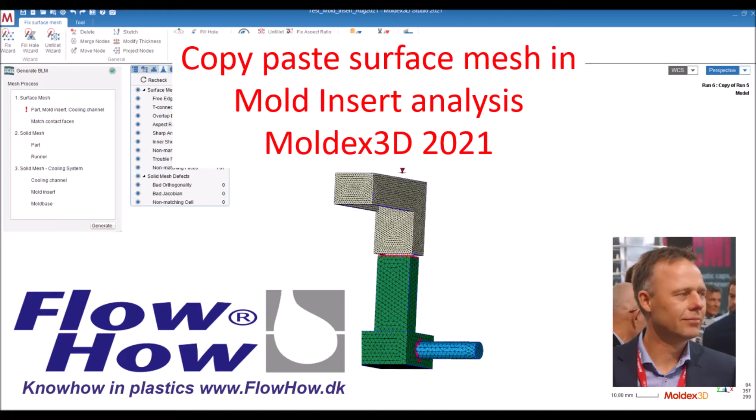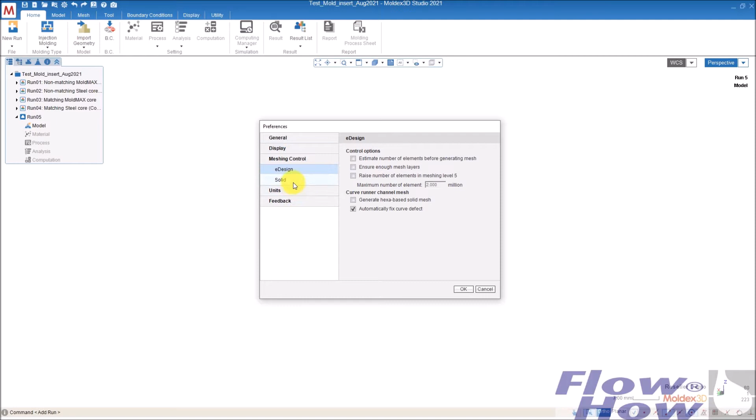If you want to match a mold insert to a part, or a mold part to a part insert. I'll just show it on a mold insert. You can normally try using non-matching, but you can also use a matching mesh. You can turn it off and on under the meshing control solid here. To be 100% in control of the meshing, it's sometimes a good idea to use matching mesh.

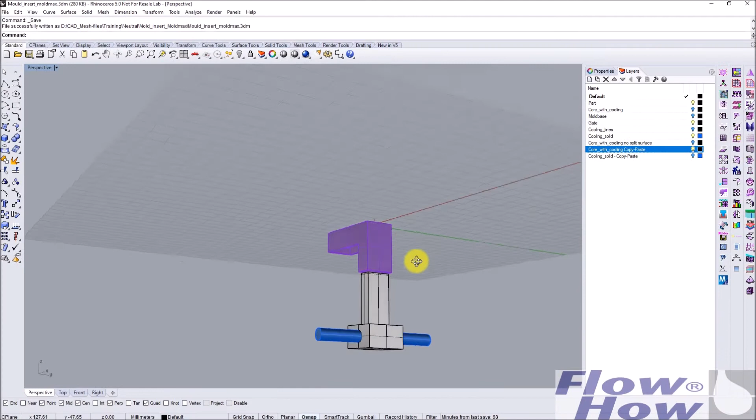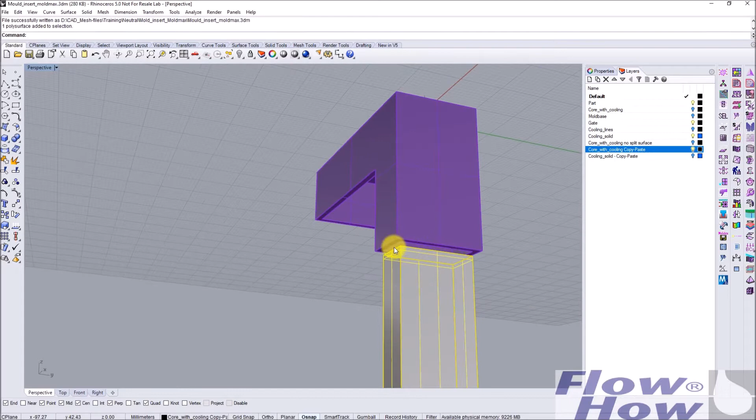I have prepared a bit of a part like this, and if you want to do a copy paste, you can of course just mesh it, keeping the core here. I have trimmed it off 1 millimeter below the part because I want to copy the mesh from inside here and combine it with this.

I will also show you how we combine the water channel. I made the water as a solid because it's much easier than using lines and giving them an attribute of cooling channel, because then you have to mess a bit around in the mesh sequence. But this is the easiest way to do this.

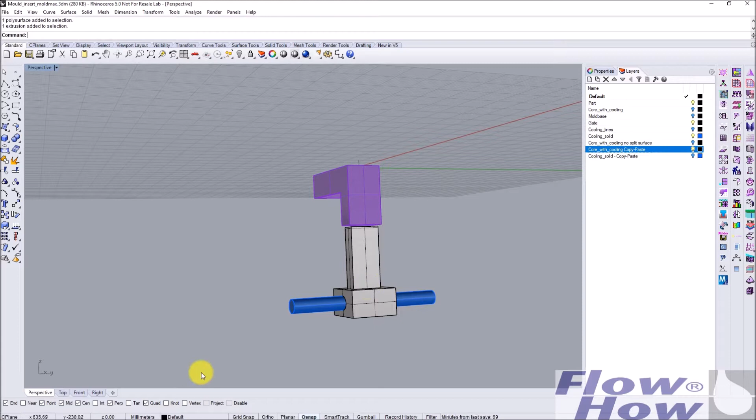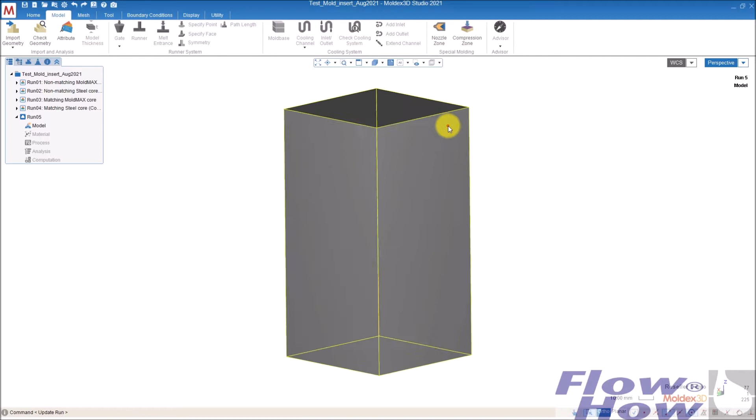So back here, I'll import the model, a part, a gate, a core trimmed, a cooling channel, and a mold base. I've also made the mold base - it's just a box in the CAD system and exported as a step file.

Mold insert, mold base - I'll just hide the mold base, I don't like to see that part. Cooling channel.

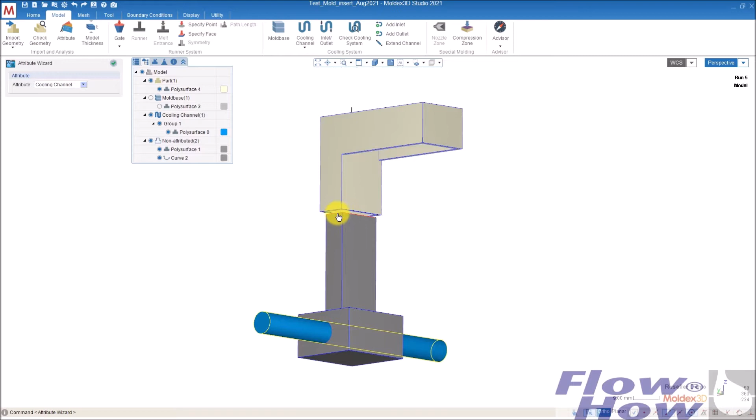You can see in my program, Rhino, which is my CAD program, it's a surface meshing, so I have an open surface here. If you have a solid, you would have it closed. You just have to delete it. But the easy thing about having it 1 millimeter or half a millimeter away from the part is that it's easier to sew together at the end.

So this is the mold insert. Mold insert, where are you? Yeah. And I normally specify the mold insert, so I give it a core. I'll just write core like this.

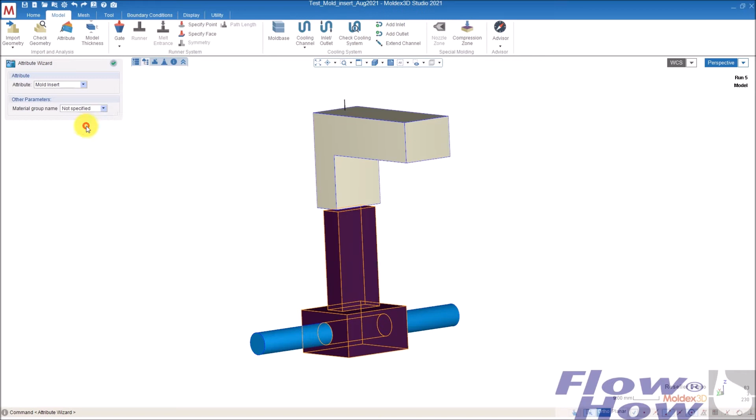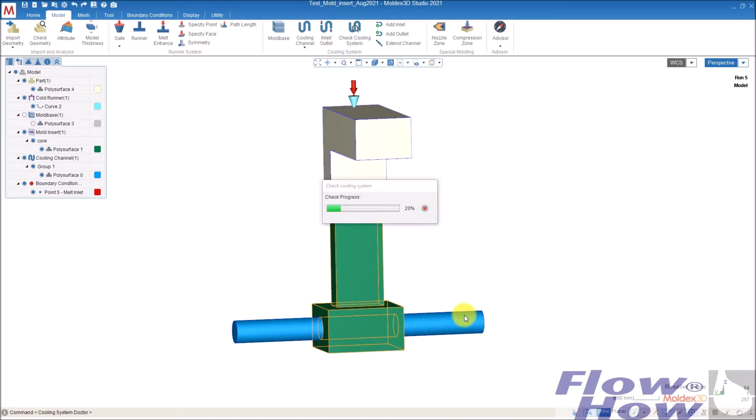So now, oops, forgot this one. This is also, of course, you can use this, but I just made this one. And melt entrance, and I need inlet outlet on the cooling. Of course, these cooling channels are trimmed exactly to the mold base. That's also why I'm using the mold base, or exported the mold base from the CAD system.

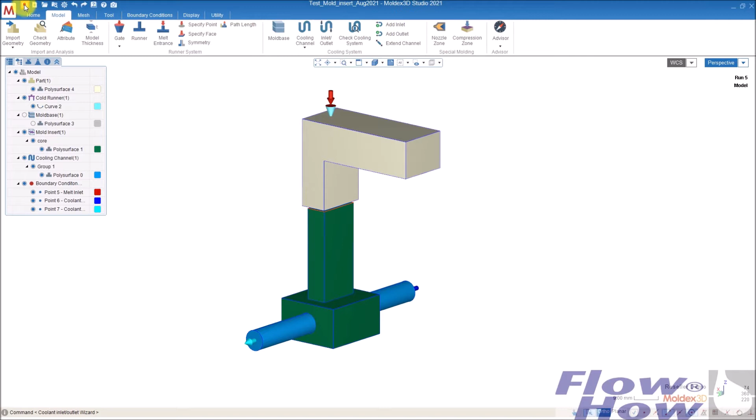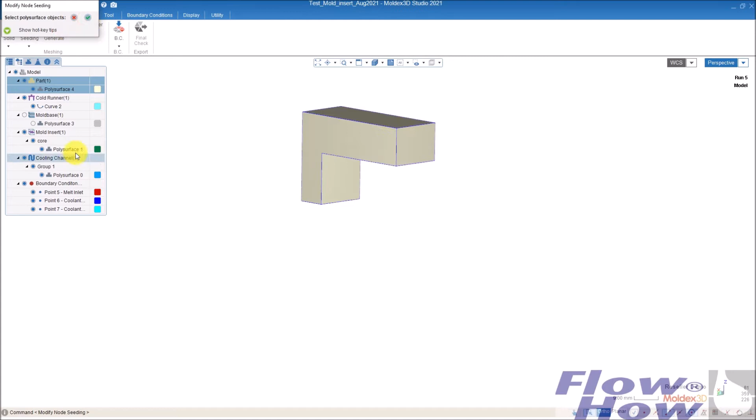So now we just have to give it some seeding or some mesh. It's quite important that you keep nearly the same seeding in the regions where you want mesh matching. So I give this one seeding of 1. I'll just give it a 1.

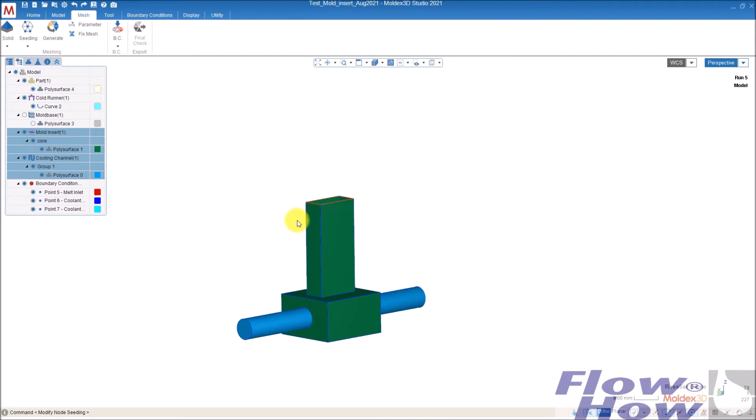Apply. Okay. And then this one down here, I'll give 2 because I don't want that fine and so many elements. But I also give this one a 2 millimeter mesh. So I'll take those both at the same time, 2 millimeters. Apply, okay, okay.

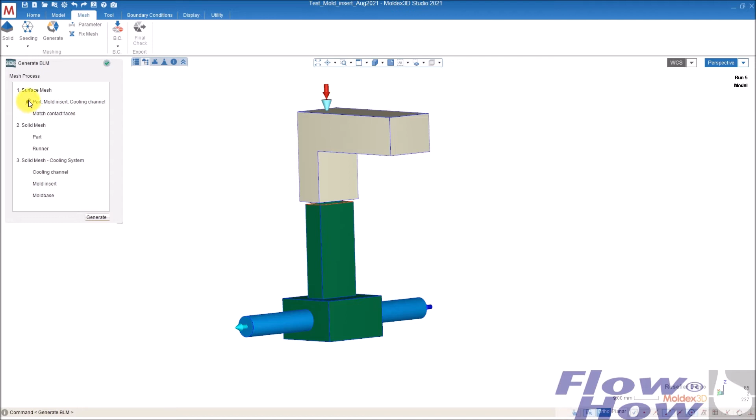So now we have the seeding, and then I want to generate. I'll stop the sequence here of meshing by clicking, putting in the pin, generate. And now you can see these are not matching.

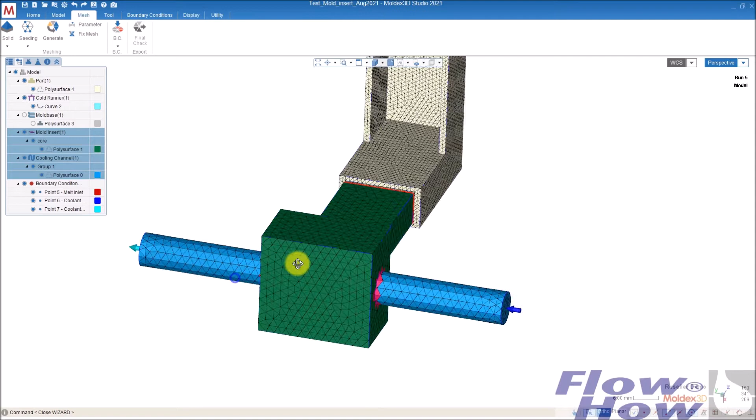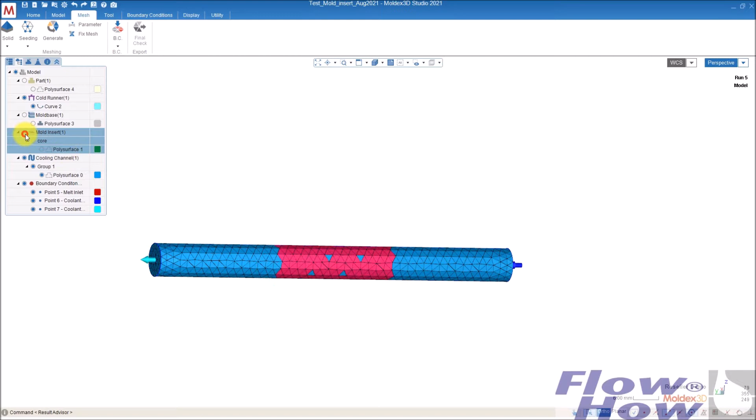So what my job is now is to first match this down here and sew it together, and then afterwards this one up. So away with the part, I'll just have focus on the cooling. I'll use the inner surface from the mold - here you can see this is not matching.

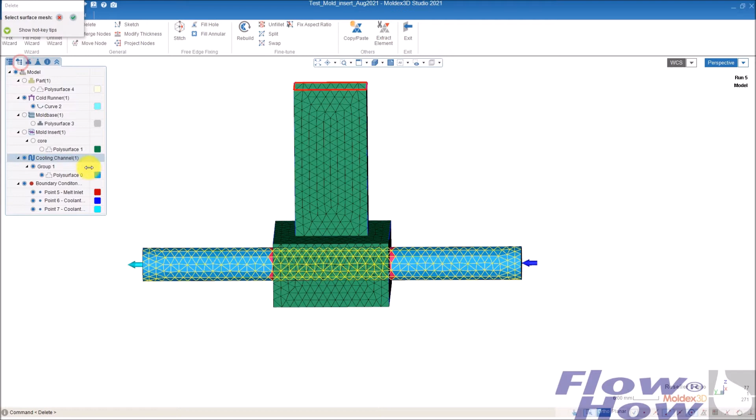So what I'll start with is go to fix mesh. We have some free edges, we know that, but I'll delete. Don't want to see the core. Select surface meshes? These two. Okay, and then I'll delete some elements.

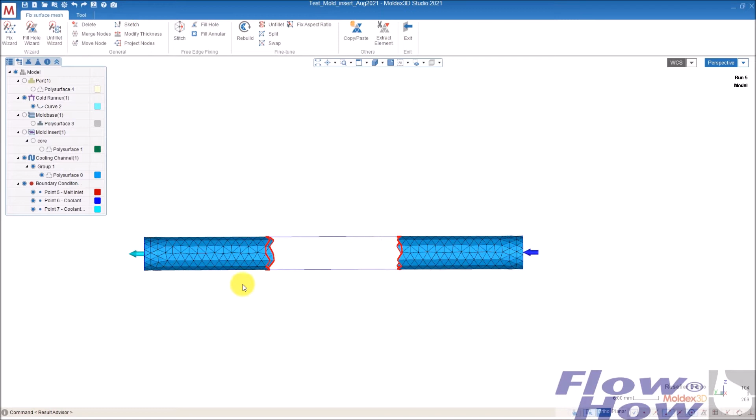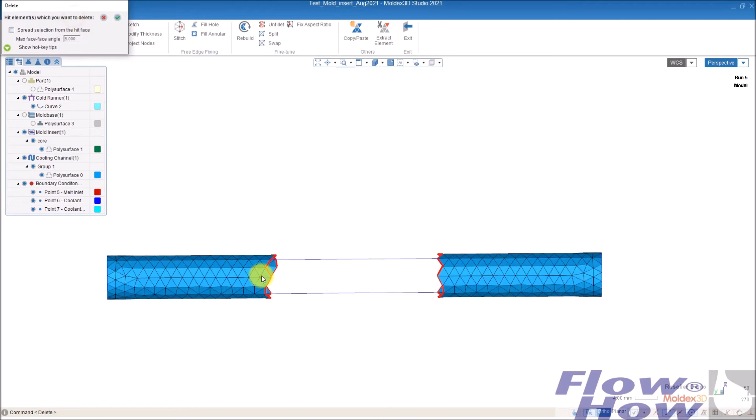I'll look from the side, and I'll take these, say away with this. And then I'll just turn on the core to see if there's a gap between. This one looks good. This over here, I need just to delete a bit more. And take these like this. So now we have an open cooling channel.

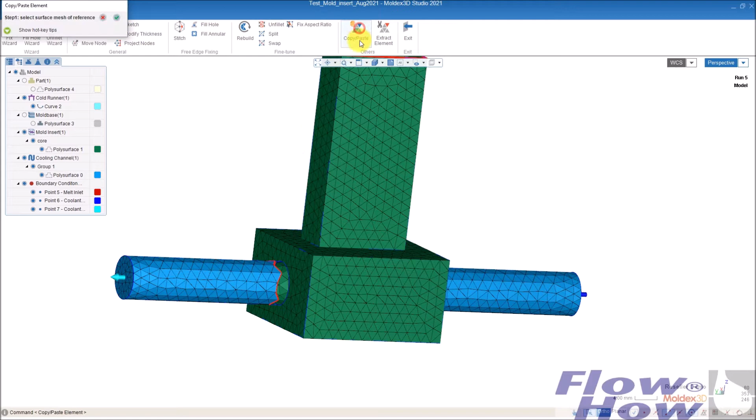So I'll use the inner mesh from the core, copy that over to this one and sew that together. So I'll do copy paste, hit this one. You can see it's split in two, so I'll keep shift down and also take this one, say okay to that, and then it asks which of these elements I take all and which do I want to assign it to. I want to assign it to the cooling channel. Okay.

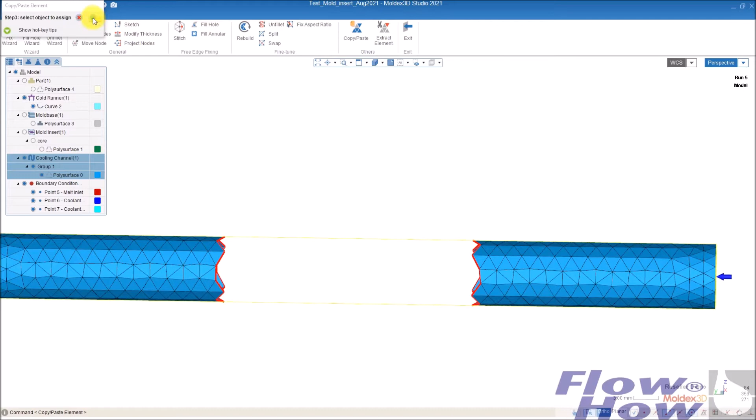And away with the core. And now this mesh belongs both to the core, but now I copy it over so it also belongs exactly the same. And of course I can move the nodes now or the mesh here.

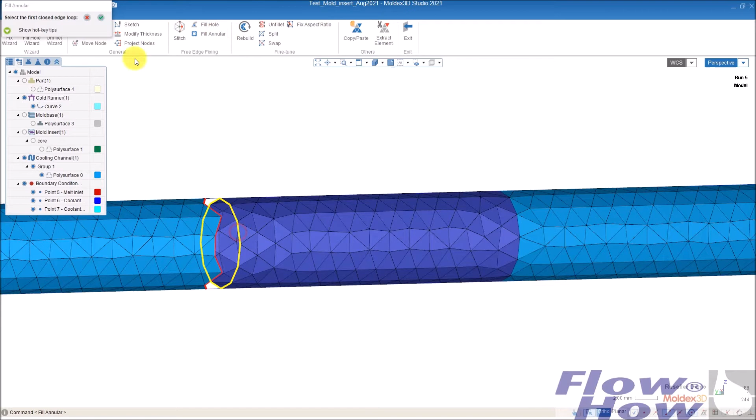So what I do is I'll see if I can use this fill annular, this one. Yeah, and it closes it. Fill annular, this one, yes, combine to this one. It did not do a good job here.

I'll say undo. So what I can do is I can sketch. I'll sketch, take this one off and say mesh, this, and this, like this.

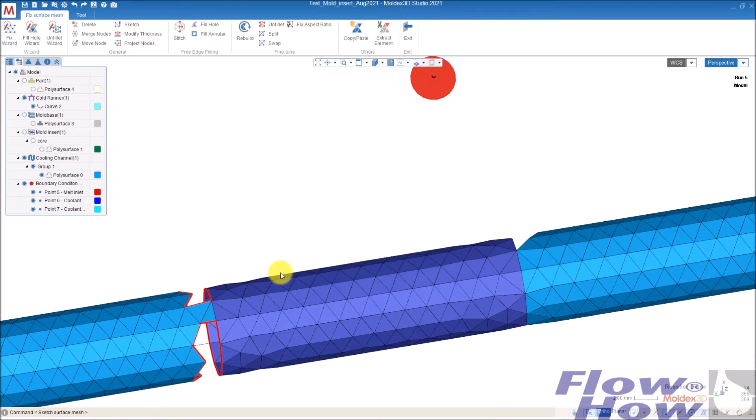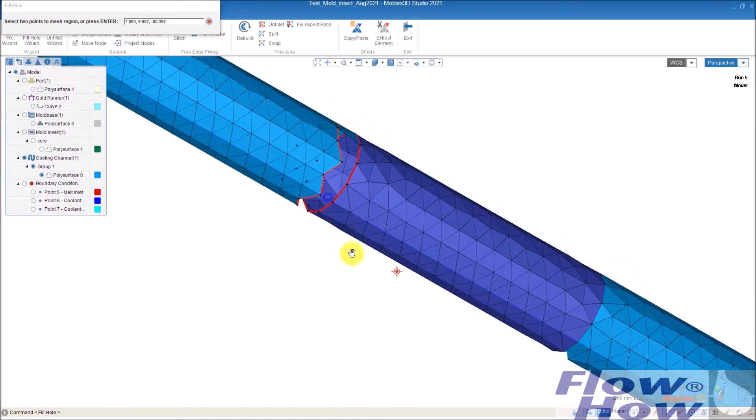And now I have this one, I can fill the hole instead of using this annular. This annular doesn't work all the time. So I use this one and then I mesh it between this point and this point. I take it in small portions, this point and this point, and this point and this point, and hit enter.

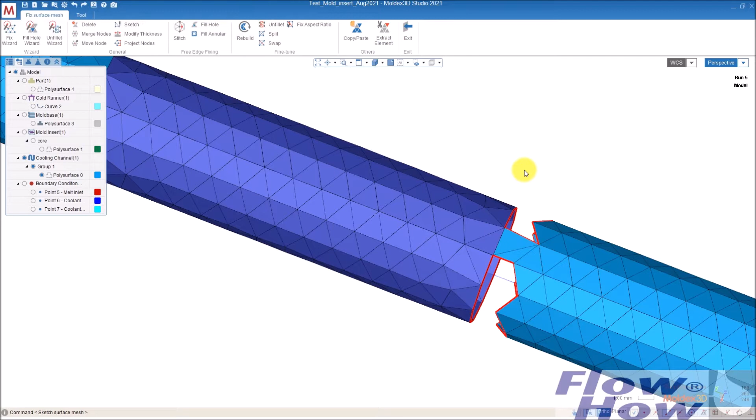Then it closes the gap. Okay, look here, it also did some nasty shit, so I'll just delete it. So I'll sketch again. This, enter, and then I'll fill it. Because now I have one closed loop, like this, and maybe I add enter.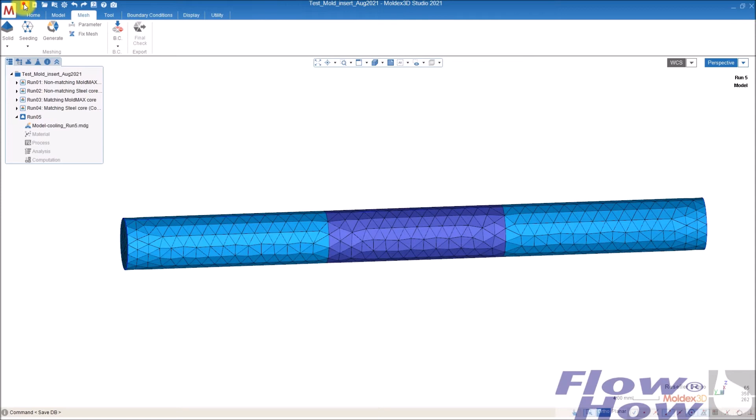So now I have it as I wanted. Exit. I'll just save. And now these are matching. If I look at this one, I don't have any non-matching.

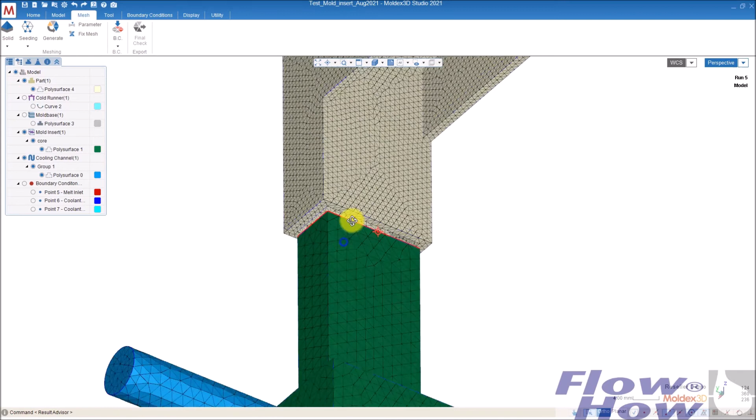So the next step is to use the inner surface from the part, and then sew it together the same way. So what I do now is I'll only show the core, and then I have to copy paste the inner here.

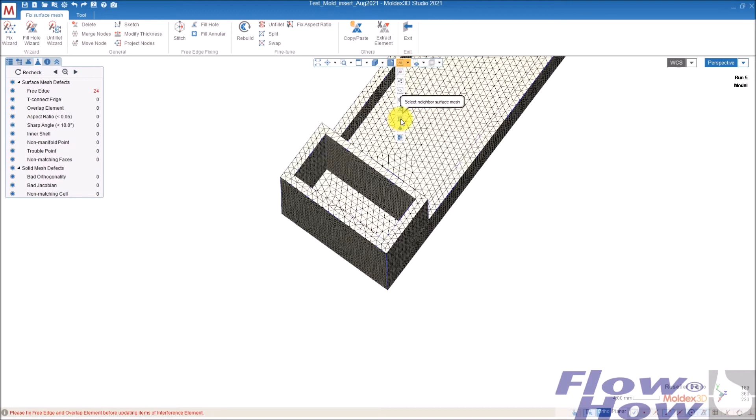I can of course point it out single by single, but I normally use this neighbor, select neighbor surface mesh. So I just pick on the one that's farthest away from the part, and when I hit neighbor, all the neighbors to this mesh will be highlighted too, like this.

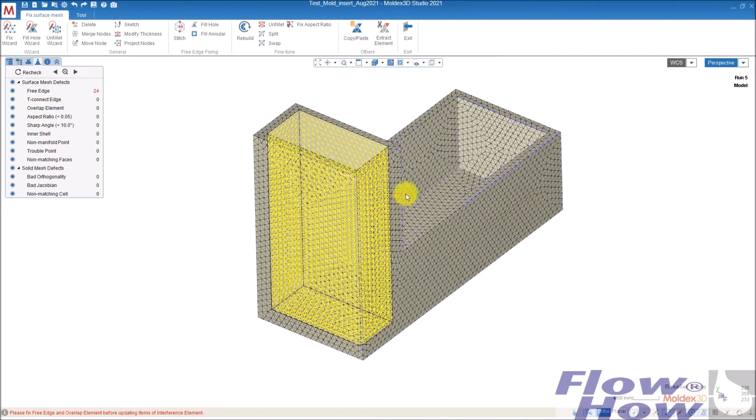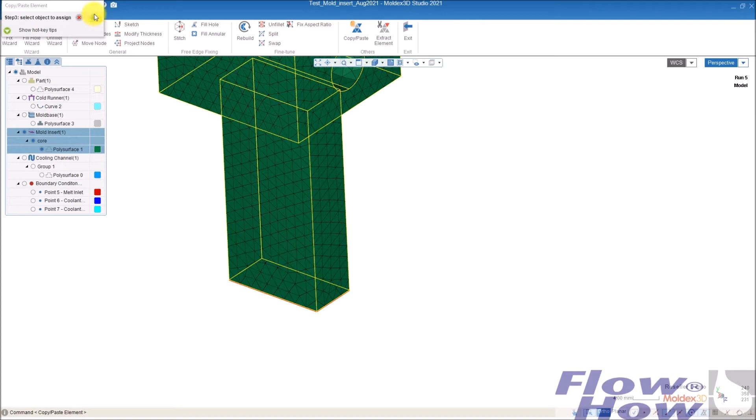And these are exactly the parts or the mesh that I want to copy. Copy paste. I mark these elements, all elements, say OK, select the one object you want to assign it to. I have hidden it, but I'll just make it visible and click on this one, say OK. So if I hide the part again, now I have exact the same issue as before.

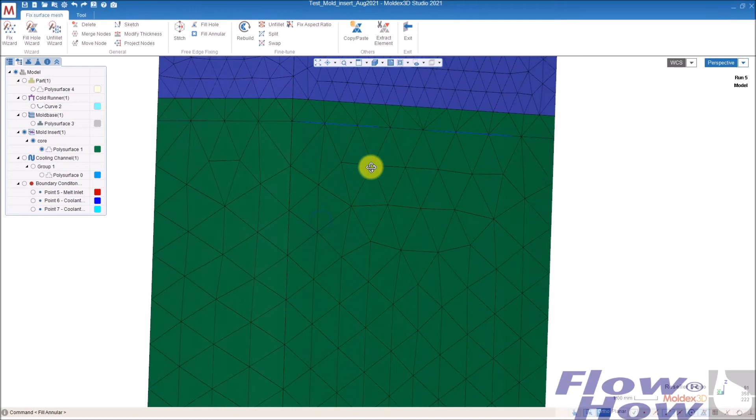I'll just see if I can make the fill annular. Maybe it works, maybe it doesn't work. I think it has a, yeah. I'll just check around. Yes, it closes the gap, and now I have a totally fully matching mold insert. So the next step for me, give it a save,

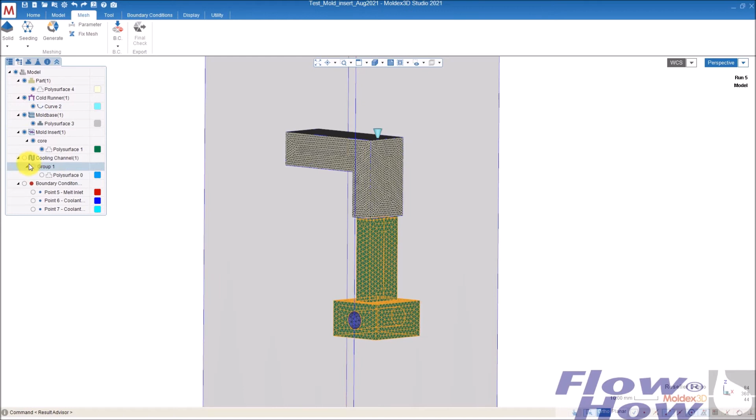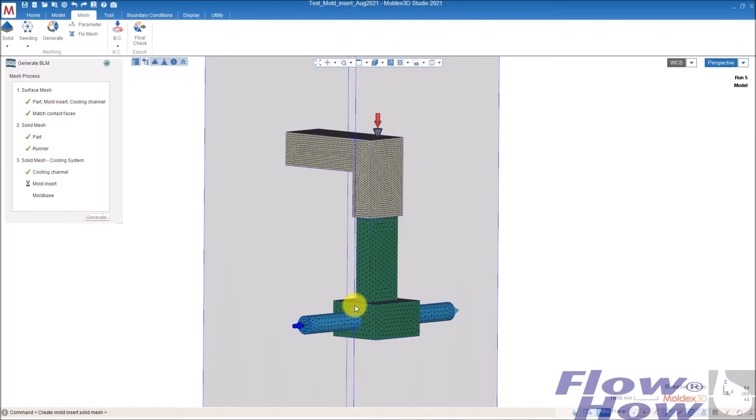Final check. Like this. And then I go to the project tree, as I call it, give it a material, process. I just use some of my settings, 0.8 maybe, no

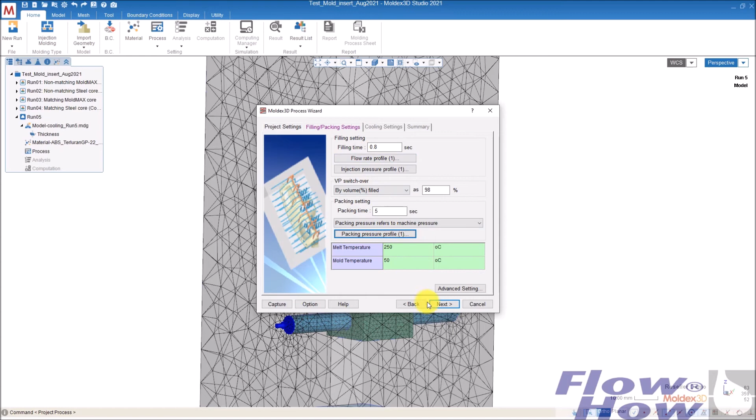profiling of the filling, packing time, refers to machine pressure, so you are in control of it. I'll give it 350 bar, 35 megapascal. Go here. Always change this to transient.

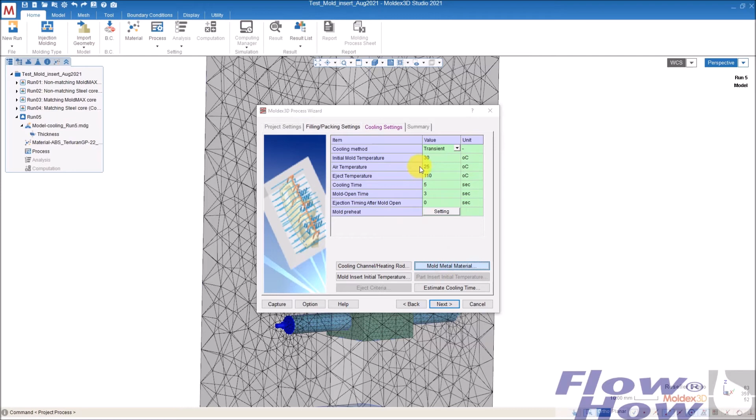If you want to see the effect of, for example, having the core in MoldMax, initial mold temperature, back, I've got cooling time 5 seconds, opening time 3 seconds, cooling channel, and give in the water here, mold metal, and here I have the mold insert. I'll change this for mold max.

Next, finish, okay, and then I'll run an analysis. Double click here, go down to transient analysis. My computation about the cooling is 9 time steps, and also here, it's like this.

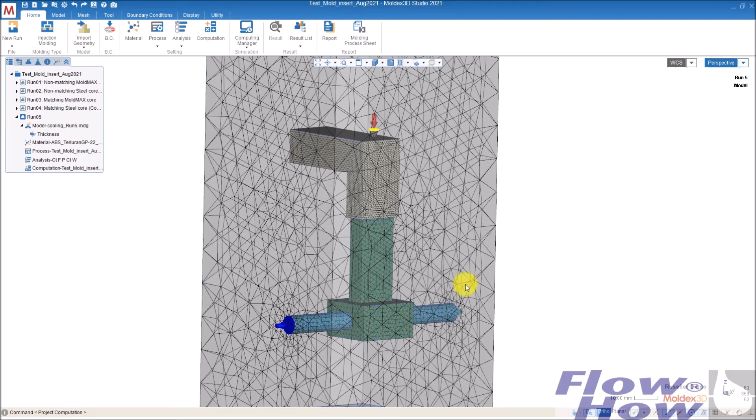So now I'm actually ready to run the analysis. Of course, I want normally to compare the effect of having a core in MoldMax or Ampco or something else. So I need also a mesh or a model where this core is steel. So the normal thing I just do is I say copy run, right click here, copy run here,

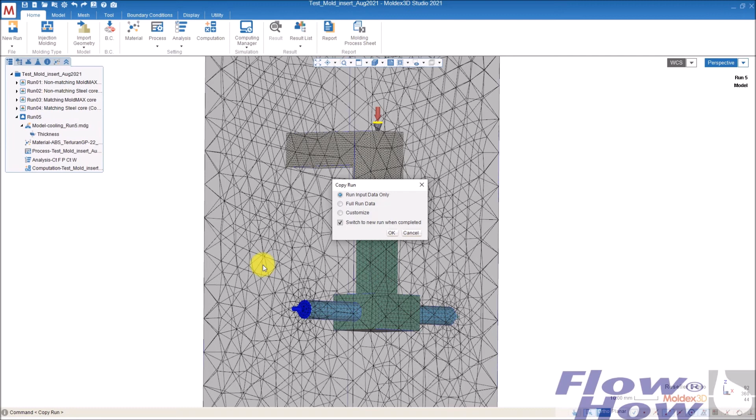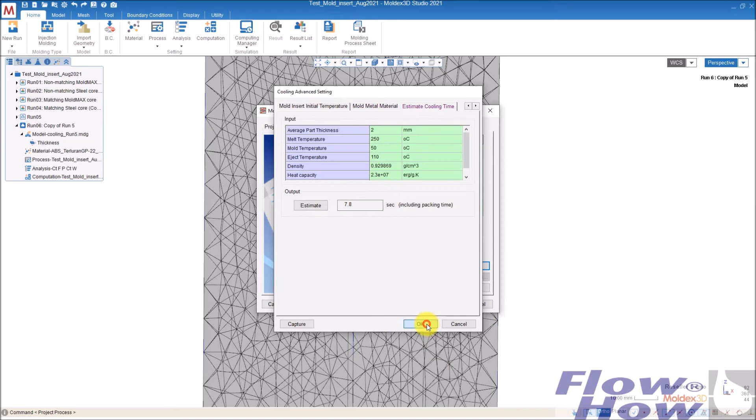and then I double click the process, go into cooling settings, mold material, and I just changed this for steel. Could be any steel, but I used the P20 as a normal general tool steel. Okay, save, okay, close. And now I'm actually ready to run 5 and 6 and see the effect of changing this mold core from steel to mold max.

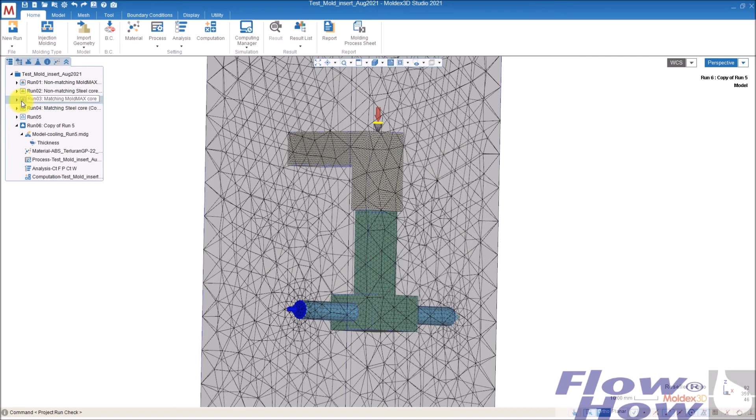And you can see I have done some already. So if we look at the results here, I can see cooling, and then I take a time step because I had the transient cool. Then I have some time step and say 7.84 seconds.

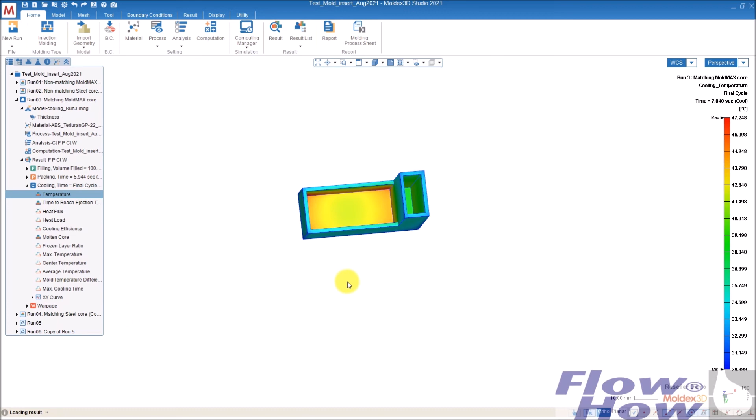What is the temperature? This is with mold max core. You can see this inner core is actually colder than the general big core because of the heat conductivity of mold max.

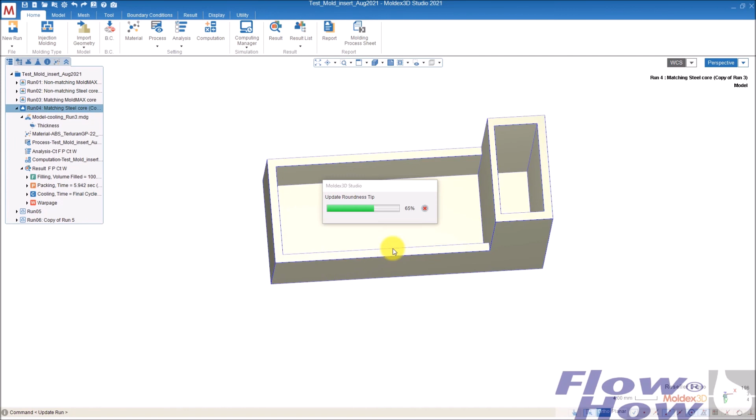And if you then want to compare to the steel core, you can do it here. I ran also this, and you can see now the outside is the same temperature. It's around 40 degrees, but inside it's around 90 degrees, and this is even not at the time where it was the end of cool.

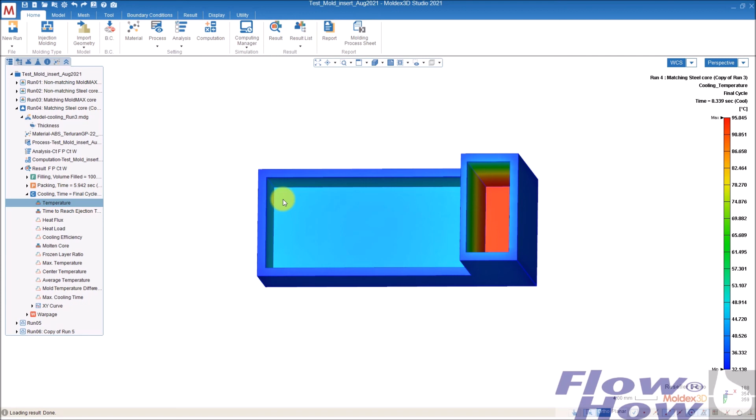Okay, it doesn't change that much, but you can see I use Moldex3D to take the decision if it makes sense to change a core from steel to MoldMAX, for example. And instead of simulation, it's great because you can just run a simulation and find out, does it make sense to use a lot of money changing these cores around in the mold.